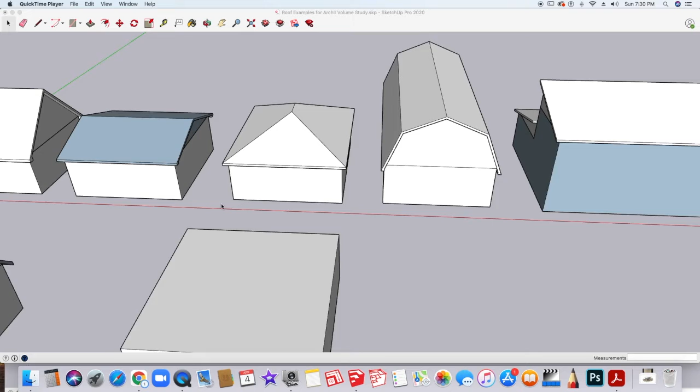For this example, I'm going to show you how to make a hip roof, which is right here. That's the one where all of the roof pitches angle toward each other. There's no open gable here. I'm going to show you two versions: one will be a complete square, giving us four sides that meet in the middle, and the other will be a rectangle shape, closer to this one, and you'll see how that looks different.

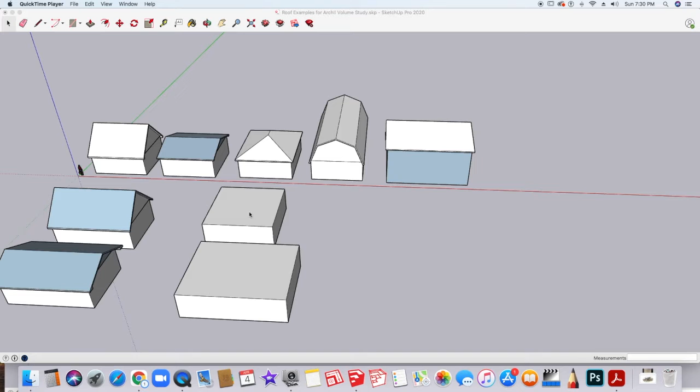Before you do anything, after you pull up your sides, always remember that you need to group your objects. So I'm going to triple click, right click, and make group. I already grouped this one, and I can tell by double clicking, I see the dotted bounding box.

This is much like making our open gable roof in that we have to establish the slope, but we're going to use other tools to make this. Before we do anything, we need to go over our top with the rectangle tool. The reason for this is we're going to use the Follow Me tool to create a path for our section to go. We're actually going to create the path now by taking the rectangle tool and going over the top face of the shape.

You can see that by just clicking, it sort of fills in there like that. That's going to be our path.

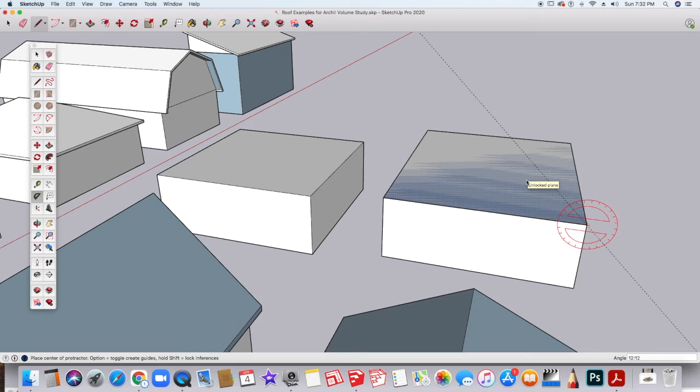Next, we're going to take our protractor tool and click in the corner, click away, click the arm, and then pull the angle we want to use. In this case, I think I'm going to use a higher angle - that 12/12 pitch, which really translates to 45 degrees. So I'll hit enter. Basically, my roof is going to provide a second story, really.

I have my angle here, and I'm going to do what I did in the other examples. I'm going to click into this corner and find the middle line. Because our surface is not grouped, it's going to turn cyan, and when I see that midpoint, I'm going to go directly up. You can see that this is almost 21 feet, so maybe this wasn't the best choice, but we'll go ahead and connect that, and then go down to the lower corner.

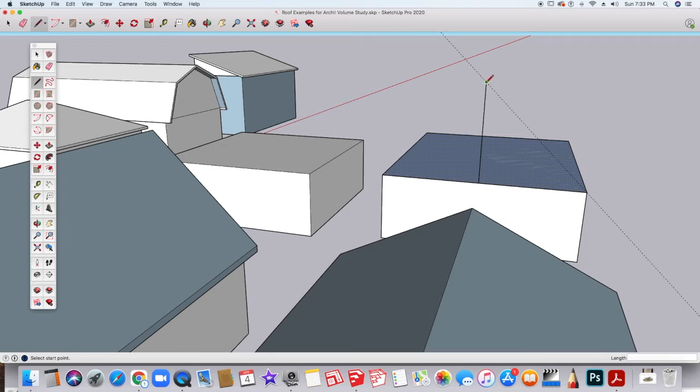Now we're going to do the same thing that we did with the other ones. We're going to come across, draw along the axis, and determine how far we want our roof overhang to be. I think for this, maybe I'll just do 1 foot for this example.

We're going to do the same thing again where we click and draw up, click escape, and draw down. This way we have an angle that we know we can hit depending on how we pull this. We're going to get this edge here.

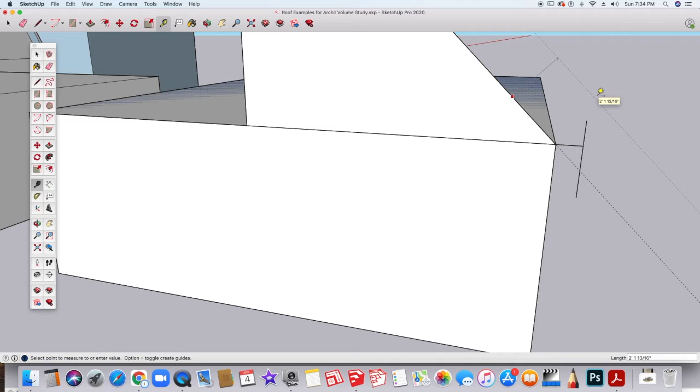Now I'm going to take my guideline again and pull out at that angle just like I did before. Make sure that you're pulling out at an angle and not like this or at a different angle. So we're just going to pull this out. I'm going to type in 5.5 inches, and that is going to give me that distance. And this again is our rafter distance.

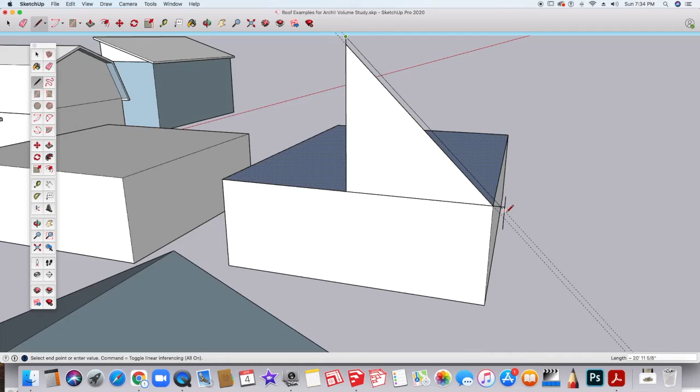Now I'm going to go ahead and continue up to the top there like I did before. I'm going to come down into where this crosses and intersects, then hit escape, and come over here and bring that line in. Next, I'm going to delete these lines because I don't need them.

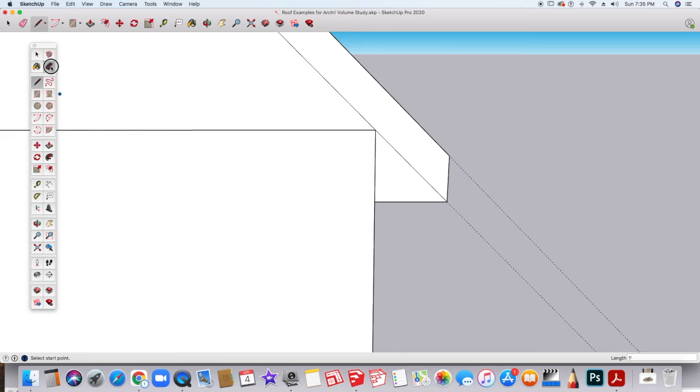And this line—now, if I don't want this to be an open rafter, I'll take my pencil tool, bring it across, and then up here. Now I'm going to delete this line. So basically I've created a profile. Since this is a hip roof, we don't need this line here, so I'll go ahead and delete that.

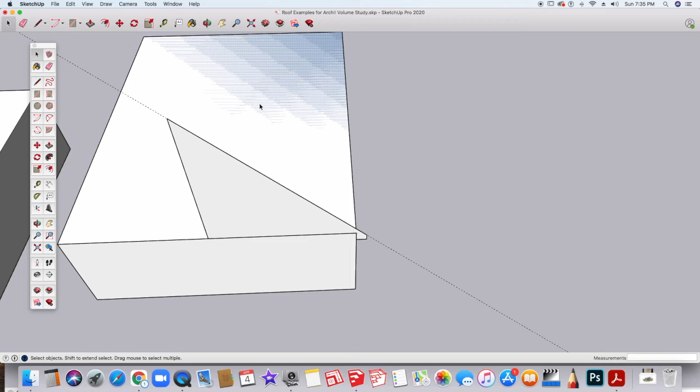Now comes the fun part. We're going to use the Follow Me tool. The Follow Me tool extrudes a profile around any path you tell it to. In this case, our path is going to be the outer edges of our walls. I'll double click and make sure our outer walls are selected.

You might have to change your view. We don't want to select that—just the outer walls. Then we're going to use this tool here, right underneath the push-pull tool. This is the Follow Me tool. You click your profile and...

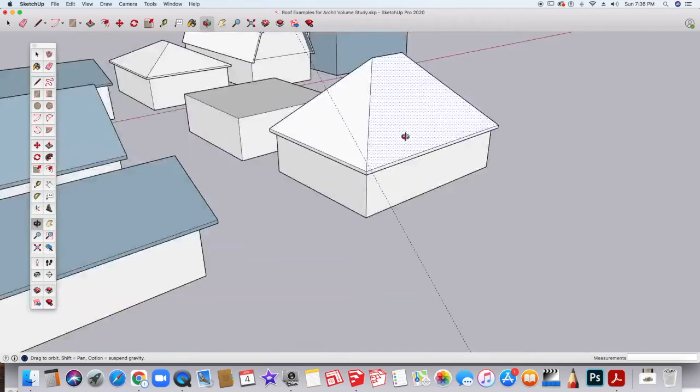Voila, you have a hip roof at whatever height or pitch you want it at. There it is, and in this case it's boxed underneath—you have a boxed rafter, so no birds can get up in there.

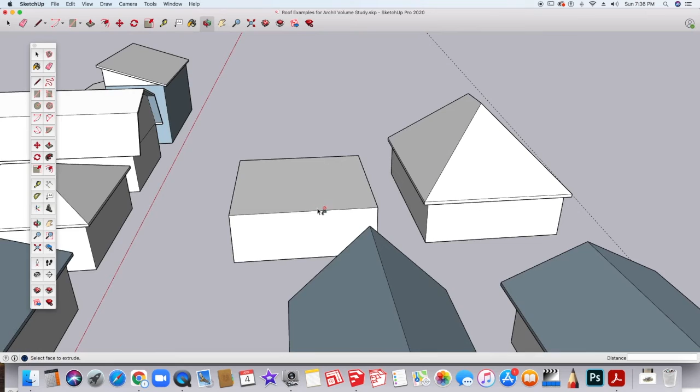Now with this one, you'll see that because this is a rectangle, some of it is flat up here, and that's absolutely fine. For this one, we're going to do a lower pitch, just like we did with the open rafters, so I'll do the same process.

First I'm going to make my rectangle on top of this—again, I'm creating the path. Next, I'll take my protractor tool, bring it to the edge here, click again, and this time I'll use that 6/12 pitch, which means for every 12 inches across, it goes up 6. I'm going to hit that.

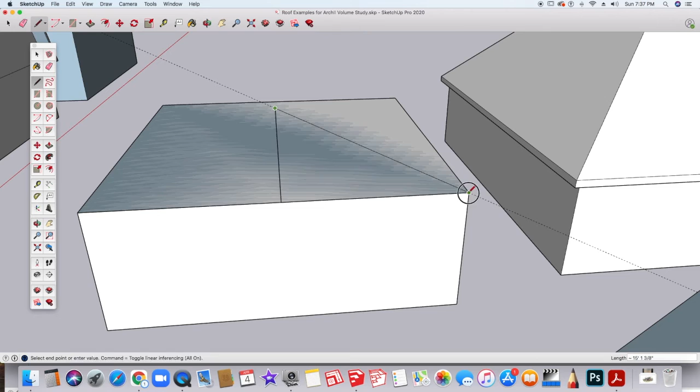Now I'm going to take my pencil tool and draw across to the midpoint, the cyan dot, then up, and I'll hit escape because you never want to draw two lines over each other. Once I do that, I'll connect it and it will fill in.

Now I'm going to do that same process on the end. I'll use the pencil tool, draw from this corner, bring it out however far I want—maybe this time 2 feet, not 2 inches, 2 feet. Now I'll pull up in one direction on the blue, hit escape, and draw down the other direction.

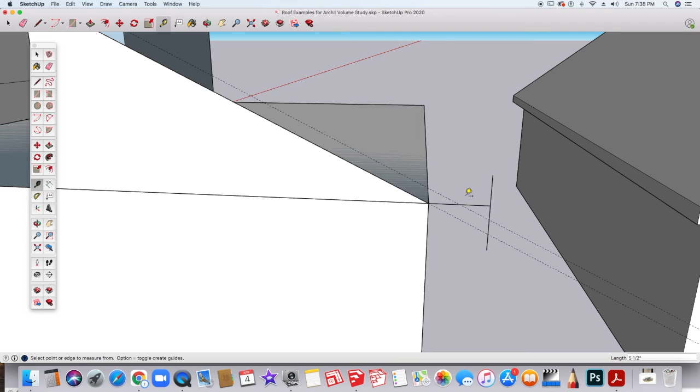So I know this is intersecting the line that I want. Now I'll go back to my guideline and pull that up at an angle. That didn't look right, so I'll just do it like this—I'm going to type in 5.5 inches.

Now I can see exactly where I need to draw my line. I'll take my pencil tool again, draw straight up at the peak on the blue, come across, click here, and hit escape. Then I'll click that line here, and now you can see it fills in—it looks like that didn't actually go there.

So now I'm going to erase the parts I don't want. Maybe I'll leave this open this time. But again, because this is a hip roof, I don't need this line here.

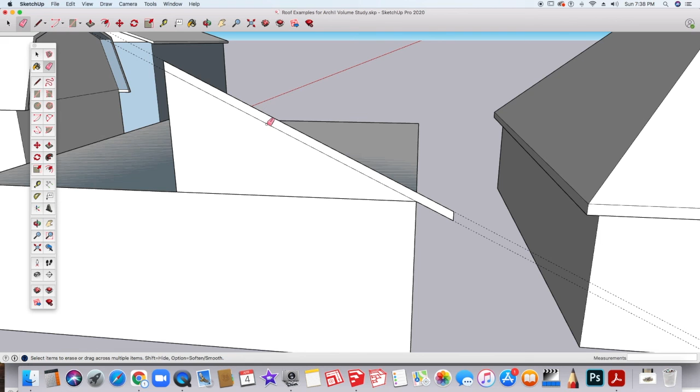Now I'll do the same thing—select by double clicking, because when you click once it selects the surface, if you click twice it selects the surface and the outside lines, and if you click 3 times it selects the whole thing. Now I have the path selected.

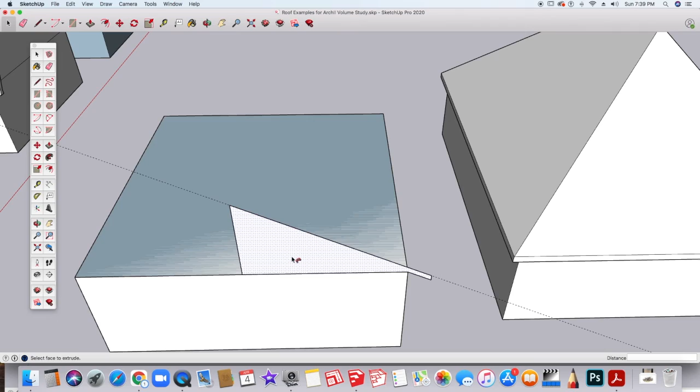I'm going to go to the Follow Me tool, click the profile, and let's see what happens. Look at this—because it's a square, it comes up and meets at a point. Depending on what style hip roof you want to make, you can alter that profile to make it work for you.